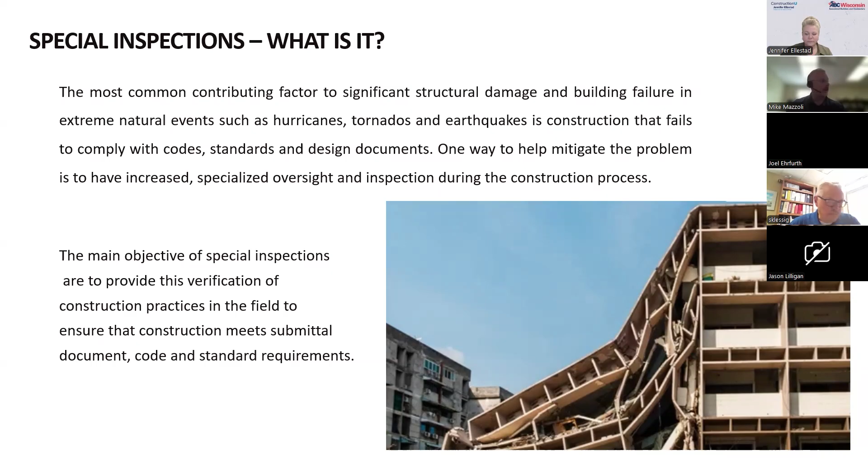Add to that too, Steve: the state and local building officials, the jurisdictions, have implemented this program, and as they've implemented it, we're responsible on our side of the house to help support that. So that's our role in the situation as well.

If you look at some of the definitions within special inspections, you'll see the word continuous and the word periodic quite a bit, and they identify a couple of different things. Continuous is during the phase or portion of work being constructed. When continuous happens is when you have to be out there - the inspector will need to be there for a full-time inspection, on a day-to-day basis.

An example of that would be foundation installation. Typically foundations are a continuous inspection. As those foundations are excavated and cleaned up, reinforcing steel is placed, and then concrete is placed, the inspector needs to be there each day that practice or procedure is performed. So that's a continuous inspection.

Now there are other things identified as periodic, which is just partial. The term periodic is very vague - it could be there 10% of the time, 25%, or 50% of the time. It really comes back to the jurisdiction on the local level and how much engagement they want that periodic situation to entail. Usually those things are discussed at the beginning of the project, and I'll get into that a little later. But I wanted to give you an idea of what that is.

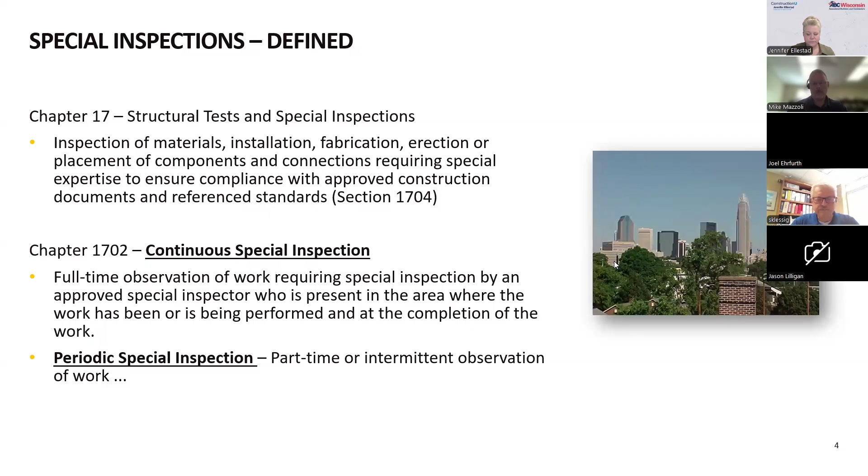Okay, and then as we move forward through the application of special inspections, a lot of these items can be identified - if you see here on the screen, it's compressed and tight to see, but typically you'll see the items listed for special inspections on your S1 drawing, in the structural drawings. They'll identify a category - categories like fabrication, steel, concrete, masonry, and so forth. Then they'll identify what type of inspection needs to be performed, and that would be the format of it.

Is it a continuous inspection or a periodic inspection? From there, that identifies and highlights what needs to be done at the given project site you're working on. A lot of these listed items are identified in Chapter 17 of the IBC - it's a generalized clearinghouse to identify these situations.

But these items listed as periodic and continuous - and I'll get into identifying those a bit later - are identified ahead of time, prior to the project starting, in conjunction with what the jurisdiction needs on a local level, and also what the designer would like to see within their given projects.

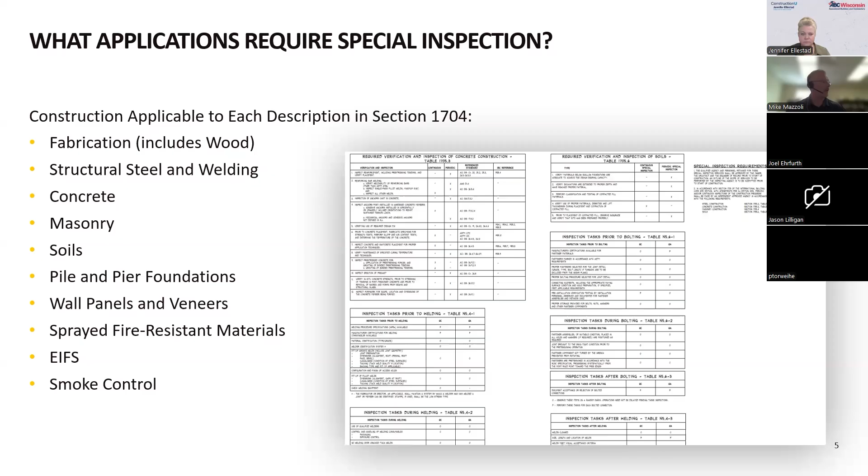I think Steve dropped off. So what I'll do is go to the next slide here. These next couple slides will give you an outline or identification of what the form looks like a little bit. As you can see, there's a listing of the item, of the inspection, that would be required.

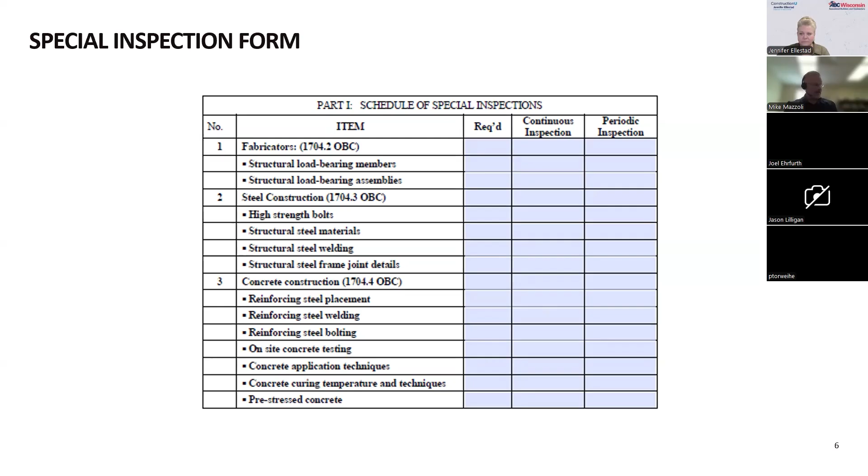Typically, it'll be checked where it says required, and then it'll also be checked on whether it's continuous or periodic. Some of those things will be continuous because of the type of project it is, and what the jurisdictional requirement is. Or it can be a periodic inspection, and that depends on the type of inspection that's needed. There's detail to these items, giving you a bit of depth on what is needed. I'll get into that a little later, it's the next topic.

Jennifer, is Steve back on? Has he joined back in yet? Can you see? Steve is back on, he just needs to unmute himself. Okay, perfect. All right, so before I go to the next slide and cover that item, I'll have Steve make any comments or statements he'd like to add to what we have up on the screen. I'll make a point for Steve.

How about that? So if you go into soils, remember when you go through the IBC and the special inspection code, there are items that identify whether these need to be inspected and how often. There's a bit of an outline, mind you that's determined by the designer later on, but there's a code or guide. So sometimes certain items do not need to be inspected under special inspections, depending on the type of structure, maybe a certain bearing capacity identified for the foundations and the type of foundations being used. Sometimes there'll be disclaimers where if there's a conservative approach to the project, it'll say our bearing capacity requirement for this job is only, say, 1,000 PSF. Since that's a very conservative and low requirement, you're going to meet that regardless, so that isn't part of special inspections that needs to be categorized. That's within the designer's purview, and we'll get into that later. I wanted to give you guys a heads up that there are items out there that don't require full-time or periodic inspections because they fit in a certain category where special inspections aren't required. Soils is one of them.

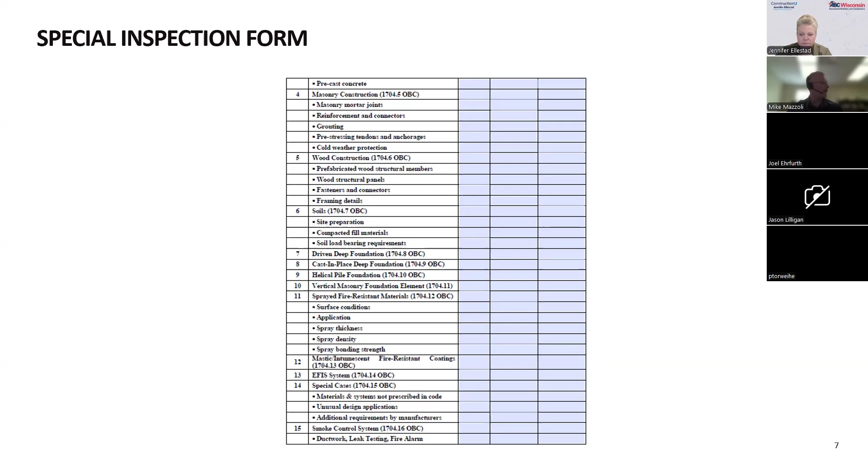We found, did you cover this, Mike, as I was trying to reconnect? Yeah, I was actually going over that and filling them in on the soils comment and things like that. Okay, I apologize for my lack of connectivity with Zoom.

But what I wanted to ask you, Mike, is if an architect of record needs some help filling out that form that you put up, is your company willing to help somebody?

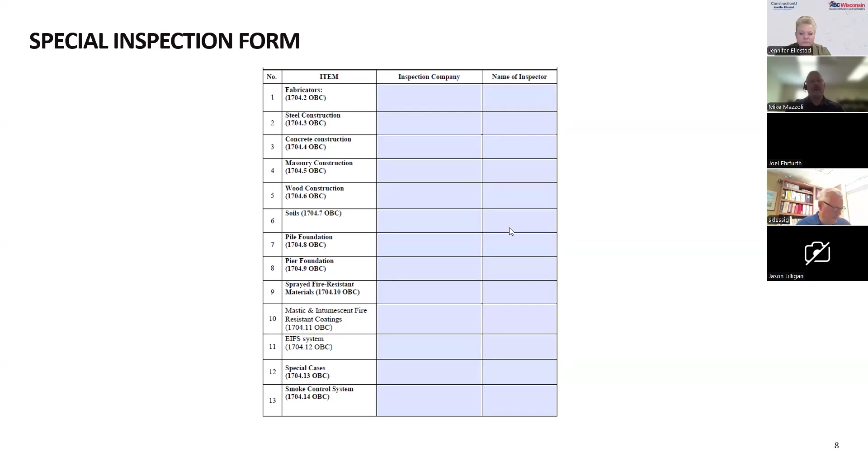Yeah, and that's what we're going to get into actually, Steve. I'll go to the next slide here and get into the next item, which kind of fits with that. So yeah, we can definitely help. The way the code reads is that the items identified, and who retains the special inspector, the special inspector cannot work for the general contractor building the structure. It's a conflict of interest for them to retain the people doing the inspections. So the inspections have to be retained by the designer, owner, or owner representation. Owner representation can mean a couple different things. It can mean an actual company that is an owner rep, or it can mean the architect is considered the lead of the project, taking on that role for the owner, designated as the owner rep.

What they want to do is ultimately special inspections. They want the oversight of the inspector to be reporting or working directly for the owner, because it reduces the conflict of interest with the contractor.

Let me stop you there, because this is the second time Mike and I disagree. That's because many of you on the call are design build contractors, just like I am at Keller, and I can tell you that in the design build world, I think many of you will agree our owners don't consider us to have a conflict of interest. They've hired us because they trust us and want us to handle the entire process.

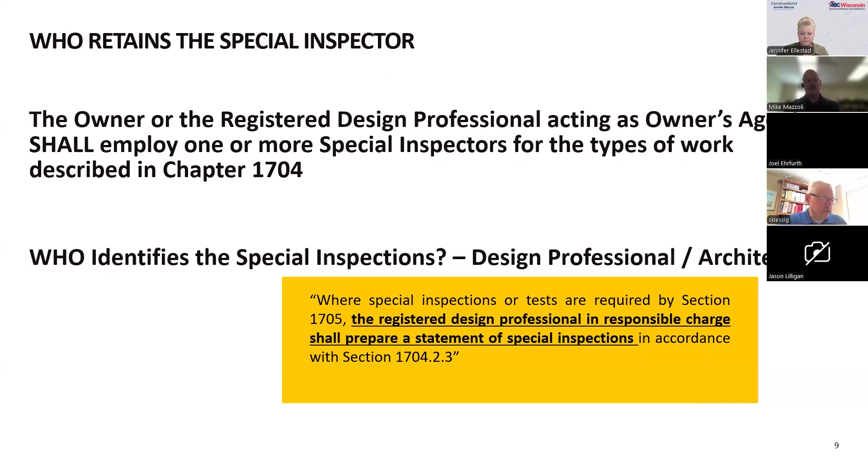Typically the structural engineer will identify the structural components of it. He'll talk about what periodic inspections he needs, what continuous inspections he needs. Those are based off past experience, maybe the type of project being constructed, but it also relates to the local jurisdiction or code they've seen in a past life. Well, hey, we built a church over here in this part of town and we were required to do these things, and we're building another church on the other end of town and we have to do these things. And I know they're going to require these items in the special inspection code, so they'll add that to the listing.

But ultimately, it's supposed to come from the design professional or architect, so that form, if you want to say, gets created.

It usually goes from that phase back to the jurisdiction and says, hey, these are the special inspections that we've identified. This is the format, whether it's periodic or continuous. Is this acceptable? Typically the jurisdiction will come back and say, yeah, it looks good. Or they might say, add these things, subtract these things.

Then it gets sent over, say, to a company like mine with PSI. We fill out the form, because how we fill that out is we identify who the special inspector is for those items on that given job. So what we do is we provide a name, maybe a PE number or an ICC number or something in that nature, and that person is registered or identified as the inspector for that project.

Then once that is complete, the designer and everybody submits that back with their drawings and prints to the state and says, we're applying for a permit. Here's our special inspector, here's the person doing the inspections, here's the inspections that need to be done, here's our check to pay for the permit. And then the city basically says, looks good, here's your permit, thanks for the payment. And then you guys go on with building your project.

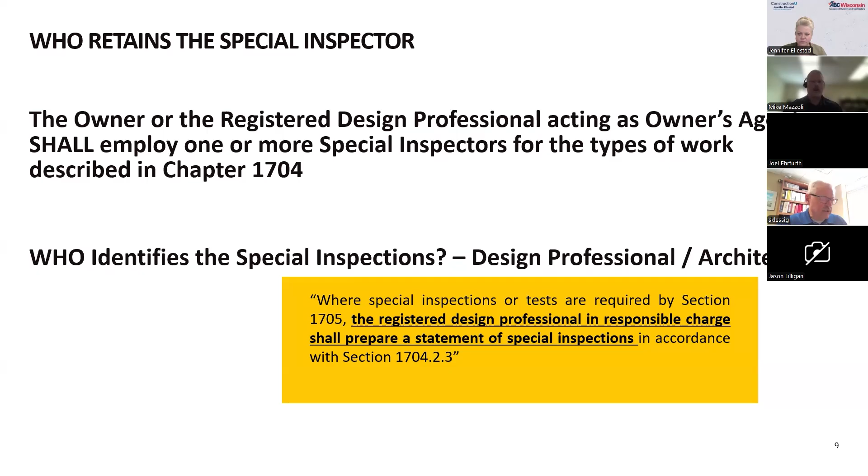Okay, and then the other item here on the fabrication side of the house. The way it kind of reads right now is if the fabricator for your project has a third party fabrication certification, there isn't a requirement to have fabrication inspections as materials are being constructed or made for a given project site. Now, mind you, I'm going to disclaimer that a bit as well, because ultimately the structural designer or the local jurisdiction could come back and say, yeah, I understand they have their third party quality cert, but I still want someone to go there and do an initial inspection, or maybe check people's welding certifications and things like that. There can be some disclaimer to that.

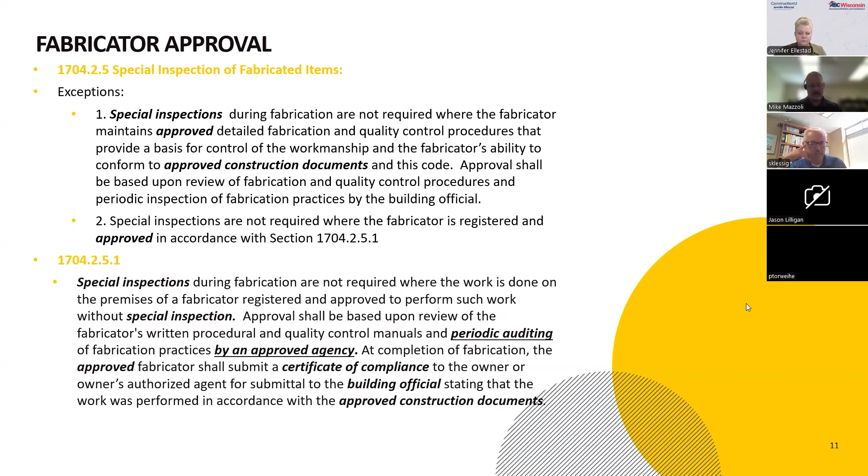But yeah, absolutely, Steve. All right, so we're going to go into the next phase, which covers special inspections and procedures. These are some of the most popular topics we get involved with, and it really shows how it's integrated into probably most project sites. So as I mentioned earlier, any of those life-critical scenarios - if there's a soils issue, a foundation issue, a structural concrete issue - that becomes part of special inspections, and they can be identified as periodic or continuous.

It depends on the project, but for soils, for example, we'll do in-place density tests. We'll do stability tests, which would consist of a proof roll. We'll do moisture content to make sure the moisture content of the soil being applied or filled on site is within range, and also proper lift size - is the contractor putting in a loose 12-inch lift, or whatever the requirement is, or are they doing it 3 feet at a time, which is potential for settlement and things like that later on.

So those are the types of things we inspect on the foundation side of the house. We'll look at the reinforcing steel. We'll look for cleanliness of the excavation or the drilled shaft. We'll make sure that there's no water at the base, and that the sides are not loose - they're stable, things like that.

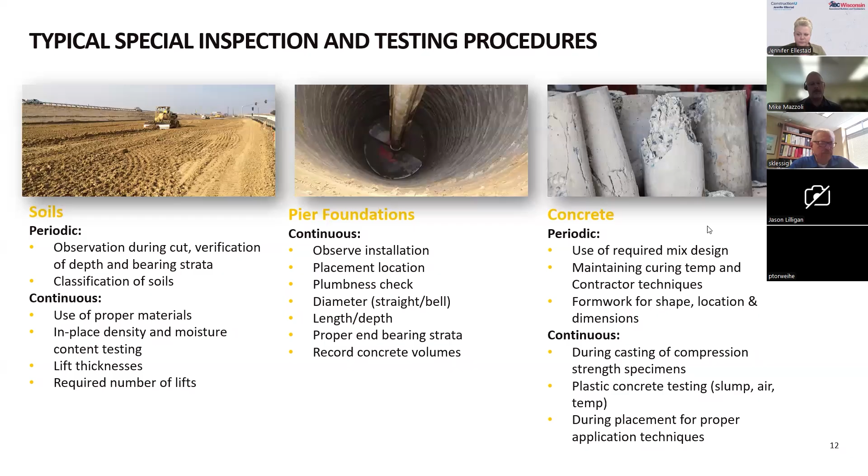Yep. Okay, thank you. Yep.

Concrete inspections, as we get into this, is just a little bit more detailed on some of those items. Reinforcing steel, typical inspections are spacing, number of bars, size of bars, clearances. Those are the types of inspections that are done.

And the one thing I'll tell you, at least within PSI, our inspections have a form or format for every inspection we do. For soil compaction, that's done in a certain manner with its own form. Concrete inspections have a certain form with things we identify on it. It's more fill-in-the-blank items, not a written write-up like 'I inspected 5 trucks today and the slumps were 5, 6, 7, 8.' It's more of a tabular, checklist form. That's what makes it easier for our staff to handle, and that's what we've created.

And then if you go into structural steel inspections, that might look into welder certifications, as I mentioned earlier. We had a job driving deep foundations, and one requirement for special inspections was to inspect the welder certifications. When we looked at them, they only had certifications to weld bridge components or bridge beams and things of that nature. They didn't have certification for structural components of vertical construction of a building. So that was a bit of a hang up, and clarification had to be provided for that.

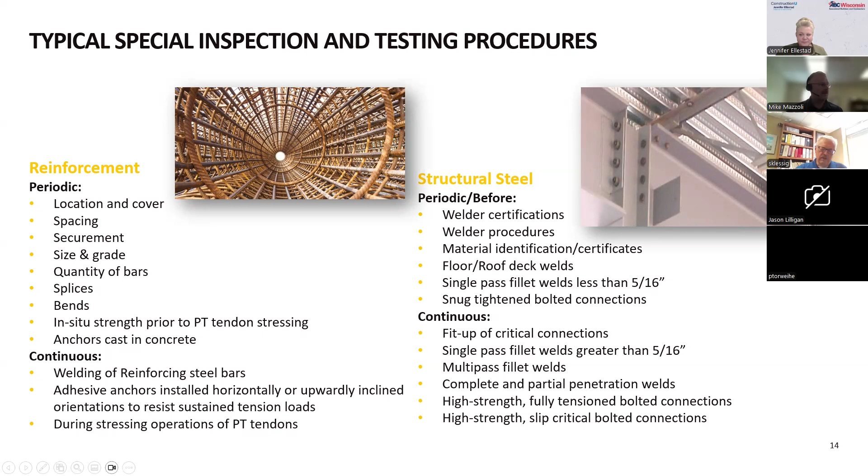Are the grout cells grouted? Is reinforcing in place? Is a proper lift size being used for grouting of a wall so it can be identified that the grout has moved down the wall and filled all the cells?

I'll be honest with you, we had an issue the other day on a project where we were not called out for the inspection. The wall was placed and built. The contractor took some photos of what was being placed and built. It goes into the example I just gave Steve. Ultimately, we can't say the wall was built per plans and specs because we weren't there to see it.

Ultimately the designer is going to look at it and say, I've seen these photos, I went out to the site, let's say I inspected the wall, I feel comfortable. It becomes an RFI situation on a given project site, and then they write a response to the RFI that says we deem the wall acceptable. That's typically what would happen on any type of deficiency.

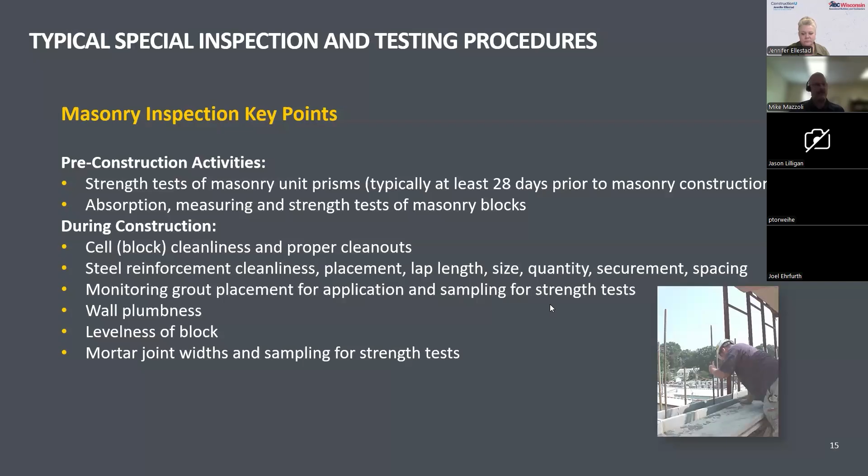So masonry walls, that's one of the inspections. And then we get into some other items you've seen more popular, or that have come into play more over time, like fireproofing, sprayed fire-resistant material. We'll take samples for density and thickness and application, and make sure the steel is prepared properly prior to application.

We'll record bond strength, and you get into the condition of the material. Sometimes you have an open structure when you're applying this material, and sometimes the material can get washed away in a heavy rainstorm. So that becomes an item, and usually they just go back and reapply it in those given areas.

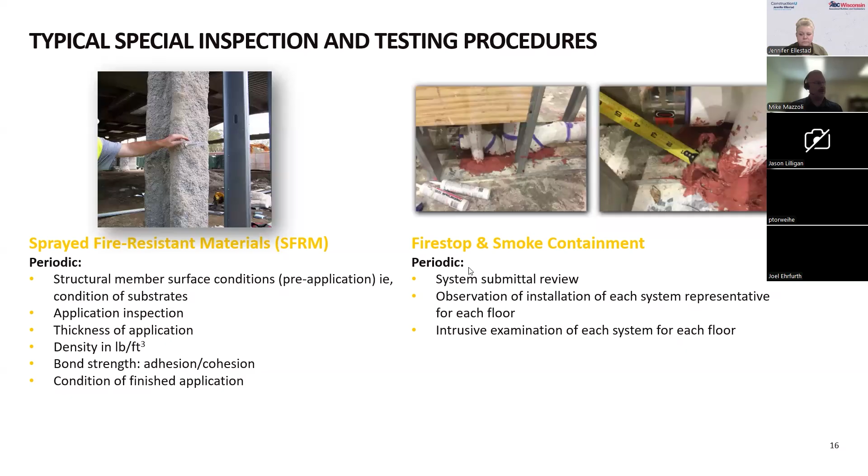And then we see a lot of fire stopping and smoke containment, basically filling gaps or voids throughout the structure. You'll see a lot of this type of inspection in multifamily construction, where there's unit to unit to unit. The goal is to fill all voids with caulking or foam or whatever it may be, to block any type of fire or smoke penetration into nearby structures. That's typically what you see on these types of inspections.

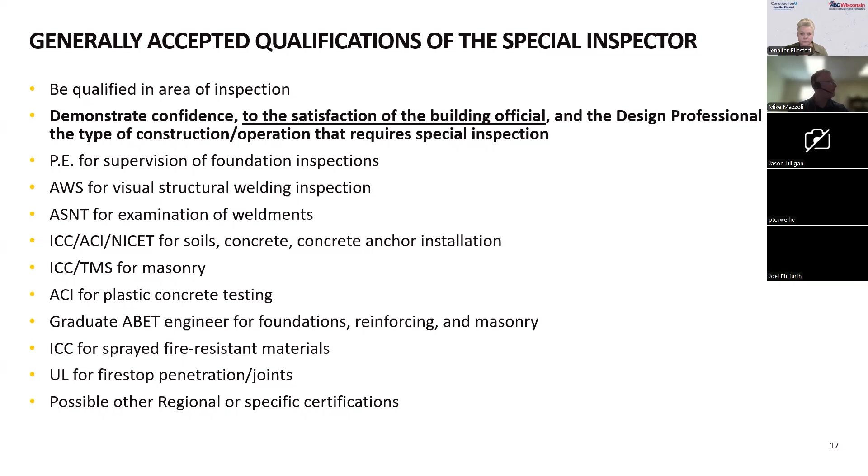And then these get into the qualifications - it identifies and gives you experience. It'll say they have to have a high school education, so many years of experience, and then they have to go to an accredited ABET university in construction management or civil design or civil engineering. It gets into those types of things.

It'll say the person can be a PE, but this here, for example, is just pulled right from the state of Wisconsin, and I wanted to share that with you. It identifies how the qualifications of the inspector have to be met for the project.

Yeah, Mike, and there's a 6-page document that DSPS has published for those minimum qualifications, and you can get that from them.

One question I had is, how much notice does your staff need for a basic inspection? How much ahead of time do we need to give them?

So we kind of talked about that, Steve, when we were going through the estimate, when you had to jump off. But what it comes to is if you have knowledge of the project, number one, that you're going to be building this project and you need a third party inspector, you need to engage with the third party company as soon as possible. You need to come to them and say, 'Hey, I've got this project coming up, can you bid on this project and accept it?' And we're in the same position that any builder is in.

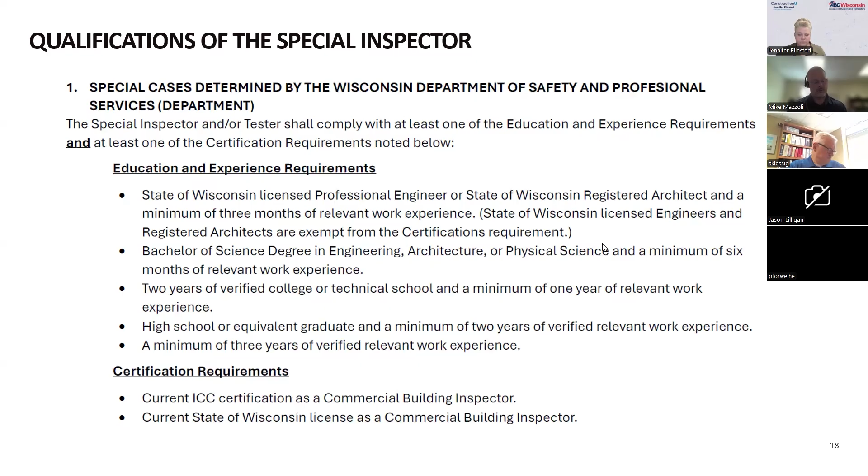Moving on to what we just covered, it's important. I'd tell you this: the more successful a project is, the better communication that took place on it. There needs to be communication from the very beginning. If there's a deficiency, who do we need to tell and when do we need to tell them? How do we log or track those deficiencies?

So number one, we're recording it, identifying it, letting the field team know. We let everybody know there's a deficiency and it needs to be closed out, because we really need to provide closure and tracking for it. The last thing we want is an issue where there's a deficiency out there, and at the end of the project someone calls PSI and says, hey, we need a closeout letter that says our foundations were built per plans and specs. Then we go back in and find out maybe there was a failed foundation inspection that never got addressed. That's an extreme case that won't happen, but it just helps track and guide things so everybody's on the same page.

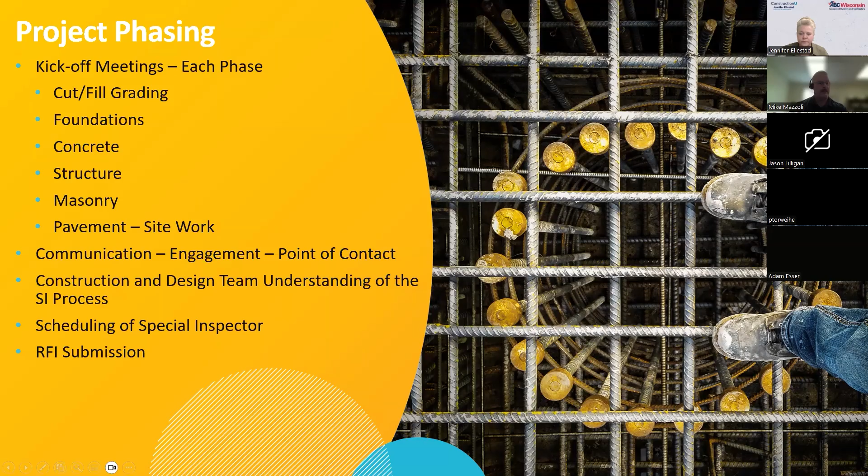I think Steve jumped off or got bounced. Oh, there you go. Okay, all right, so Steve, we were just talking about communication with scheduling and making sure the contractor schedules it.

It needs to be very specific during that scheduling process — a day and time that we need to be there. Typically what happens is the contractor will call us and say, 'Hey Mike, I need you here tomorrow, we're going to pour at noon, 175 yards of exterior concrete.'

So we know off the bat we're going to need to test the concrete for slump, air, temperature, and make sets of cylinders. We're going to need to make 3 or 4 sets of cylinders, depending upon what the spec is. It gives us a debrief to call us up and say we're going to pour concrete, whatever Wednesday, and that's the message it has to be. It's great. We need to know yardage, the time you're going to place, all those things. And it helps us with scheduling, because if we're only covering 8 yards of concrete, we're only going to be there probably like an hour, maybe 2 hours. But if there's 800 yards of concrete, we know we're going to be there for 10 to 12 hours or whatever the number is.

All right, and that concludes the presentation. I guess we have a little bit of time here for question and answer, so if there's questions out there... yeah, I don't know Mike, how...

Okay, I'm gonna attempt here to share the chat box. Let me make it a little easier for everybody. Did that work? Can I... can see your LinkedIn. There's someone's LinkedIn tab that's up right now. It looks like... wait, it says LinkedIn. Let's try that again. Selecting this screen, if not we can just... let me click stop sharing on my end. I don't know, in Teams you don't need to stop sharing and someone can just take control, but let me do that just in case. There you go, all right, let's try this one more time. Otherwise we'll just read them off. Okay, let's try... obviously my laptop doesn't like Zoom, so don't, don't rely on me. How about that? Anything from chat come up? No, it just says ready when you are, and there's like an entry to kind of show.